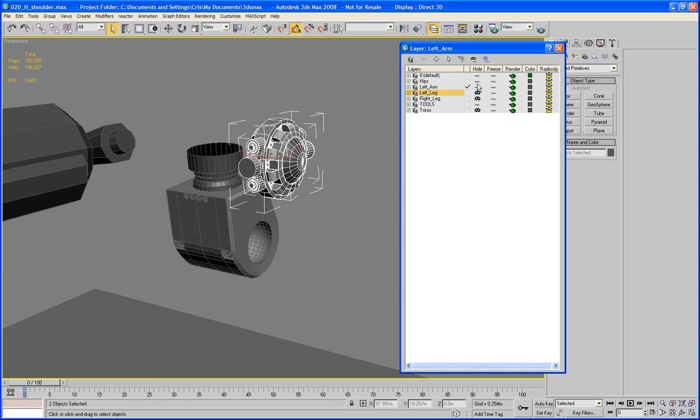Now what I'm going to do is make sure left arm's defaulted. I'm going to unhide my tools, but hide the torso, the right leg, left leg, hips, and default, just so I can work on this.

Now the first part of the arm is just a simple L bracket, yeah? So it's just a simple elbow joint really. I'm going to want to do a little bit of reshaping work on this. At the minute, if you look, there's quite a lot of flexibility built into this socket. So what I'm going to do is take the first two rings and remove those. Here, loop it, Control Backspace, and that'll get rid of this part, because we need this part here.

Now I'm going to cap it off, like that, and just nip to - hang on, where's my secondary reference? There it is. Nip to my secondary reference over here.

Right, now what I'm going to do here, and I'm kind of looking at the shape while I'm doing it, because it's an interestingly complicated design, is I'm going to select this polygon and bevel it first. Just a little bit first. There we are.

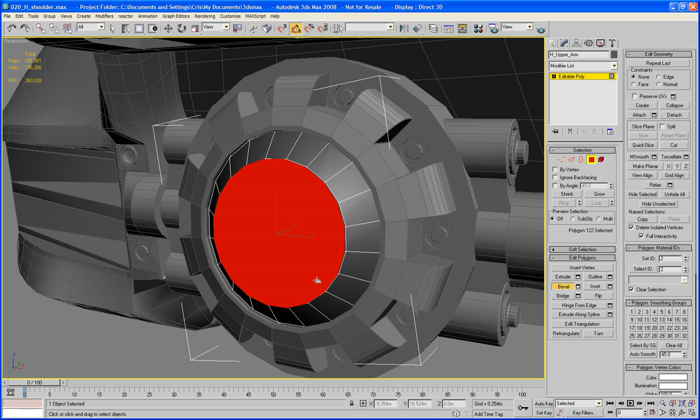And then I'm going to bring it up a little bit, then out a tiny bit like that, and then up like that. Then this tiny bevel in, like so.

Right, now over here at the top, if I select this, this and this, what I'm going to do is just extrude these straight up, like so. Now I'm going to get this one, change it to local, and just move this one until they're flattening down a bit.

Now with all three selected, I'm going to scale them on the local, just in this direction. I can also - hang on, let's redo that. I can also scale them down just to make sure they're nice and flat. And then I'm going to bring the rear in.

Now for this I'm going to move it off being on local again, just move it to world, or even view. There we go. Just bring that forward a bit.

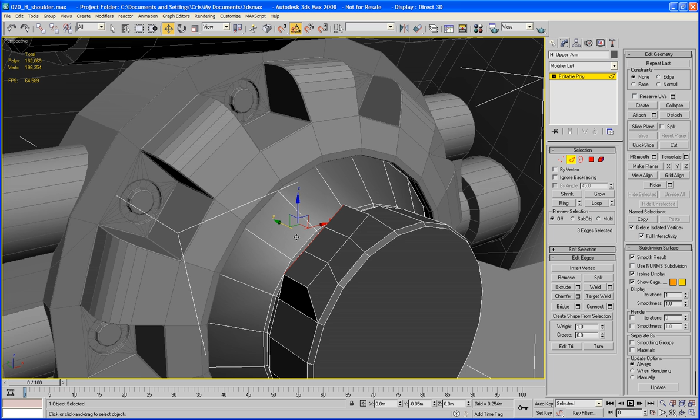Now take this part and this part here, and I'm going to chamfer it, like so. And next, just kind of looking at this piece,

I'm going to make some pipe holes using cylinders. Just auto grid these. I'm going to make them 22 sides, one height segment, no cap segments. Just pull them out. Now then, if they're not appearing, it's because I need to turn auto grid on. There, that's better.

Convert to editable poly, and just grow it out, and then get rid of that back facing. There we are.

Right, now what I'm going to do is just move this a couple of times. So I'm going to put one here, like that, and then I'm going to put another one over here like that.

Then I'm going to attach them and delete these, and then just bridge them, then delete this and this, and bridge these as well.

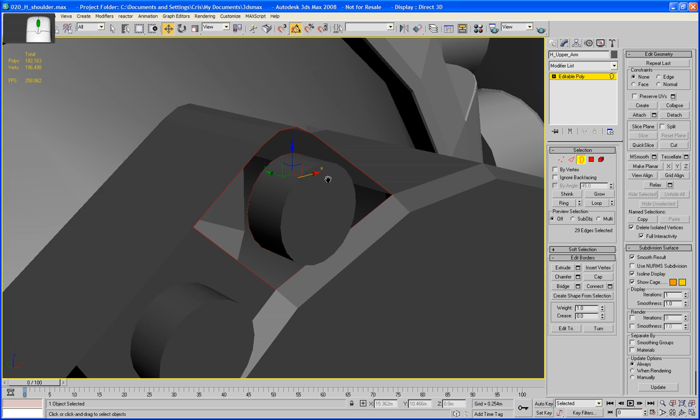Just want to make sure our bridge is going to be okay though, so just hit F4 to make sure we haven't got any damaged polys. You see, we have on these ones. It's these edge chamfers that tend to do it though, so what I'm going to do is move to edge select mode and bridge them instead like this.

There we are, and now I'll just cap these. So the bridge tool is useful, but not very often.

Now I'm going to bevel this a little bit. Tiny inset, and then a tiny bevel in and down.

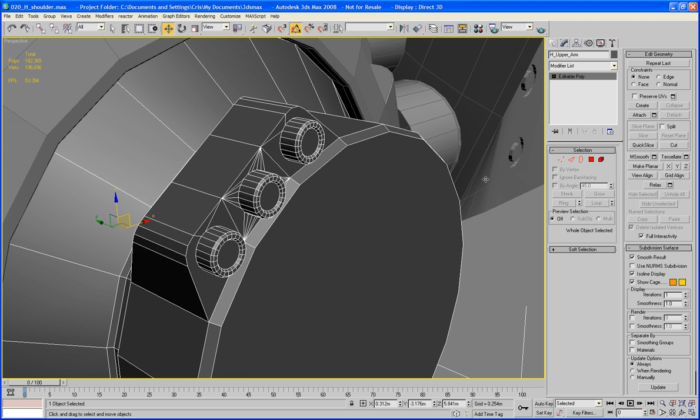Next, I'm trying to avoid doing lots and lots of tiny wires. You can put those in if you want, but the problem with tiny wires is that, if you've ever done lots of them, especially in games modeling, you'll know they're not the easiest thing to put in as normal maps.

What I'm going to do now is grab this, use my rotate tool, making sure I've got angle snap on, and do 90 degrees. Clone it to an element, and I'm just going to pull it straight out like this.

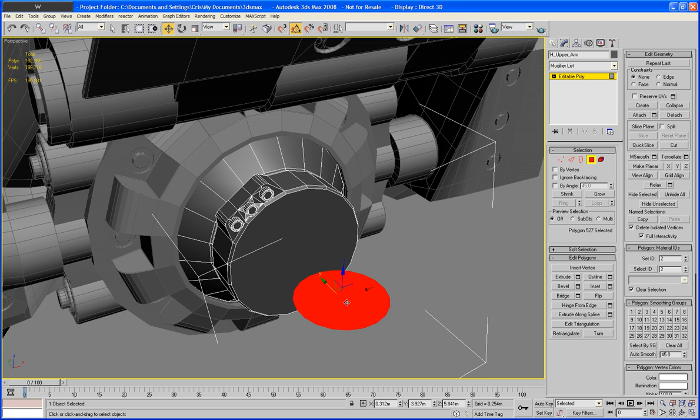Now I'm going to reduce it in size, so I'll just scale it fairly uniformly, and just move it more or less into the right position. It's a bit of a tricky one because I want to make sure I'm getting it in the right place.

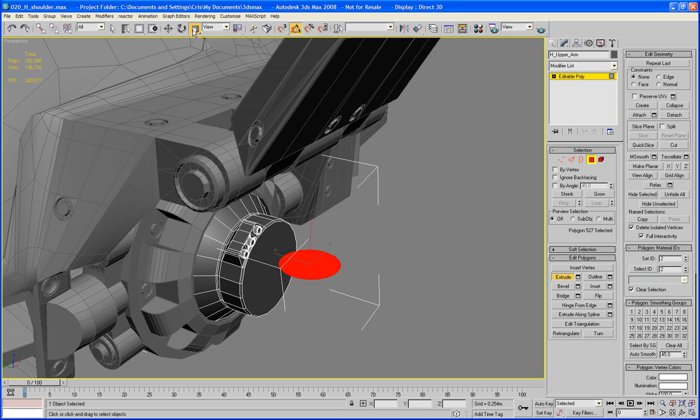I'm just going to scale that out a little bit more, and check my other references if I can find a decent one. There's not very many decent references at the elbow joint because not many people bothered making it in 3D really. Okay, there it is.

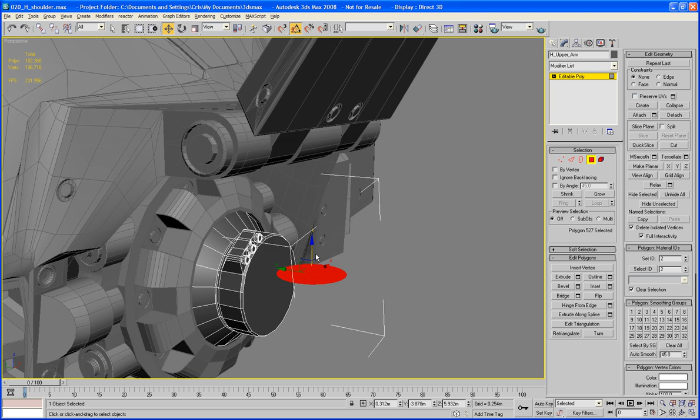Right, I'm going to pull this up to round about here, just before the bevel, and pull back.

Now what I'm going to do is cap the rear side, that'll create a polygon, which means we can now extrude this.

Just making sure I'm extruding in the right direction first. Okay, and I'm going to extrude down to round about there, just where it comes in on the bottom, yeah?

Now, I'm going to go through the middle and do a connect. I'm going to chamfer that connect nice and wide.

Say to about there, and just take out the middle ones. You notice I had this at two segments in the middle - that's okay, I didn't bother removing it since I'm going to delete all the middle ones anyway. Now this gives us this shape that I can work from.

So what I'm going to do is do both of these at once, doing freehand beveling. I'll just cap there, make sure it's not too close - it needs to be a little bit further away, I think. Let's see, maybe not, no it should be okay.

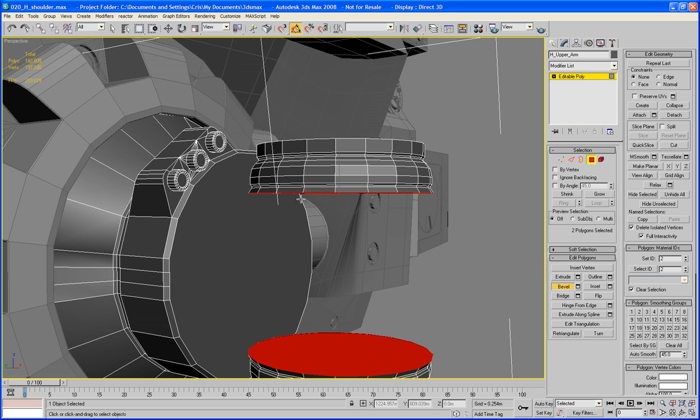It's quite a complicated shape, so take your time doing this, okay? It's a bit like a hamburger shape actually, I was thinking - it isn't really obviously, but you know, that's what it reminds me of. I find it interesting that doing this is actually affecting the polygons over here - you're probably watching that as well.

Okay, and then just pull this in a little bit here. There we go.

Right, because we're going to separate this off into two areas in just a moment, so I'm going to grow this. Like so, and detach it.

Just make sure I've got the inside spindle. Just shrink it down a little bit because I want these two separate. There, now.

Detach, and we're going to detach it as - let me see - well, if that was the upper arm, this is really the lower arm. See? So H higher arm, H lower arm - sorry, upper arm, not higher arm.

Right, now I need to do a little bit of capping on the ends of these. So one's going to have to go here and one's going to have to go here, and just cap that.

I don't know why I keep getting this funky polygon thing going over here - I'll have to sort it out. Unless - oh, I see what's happened, I've accidentally chamfered it by the looks of things. Look.

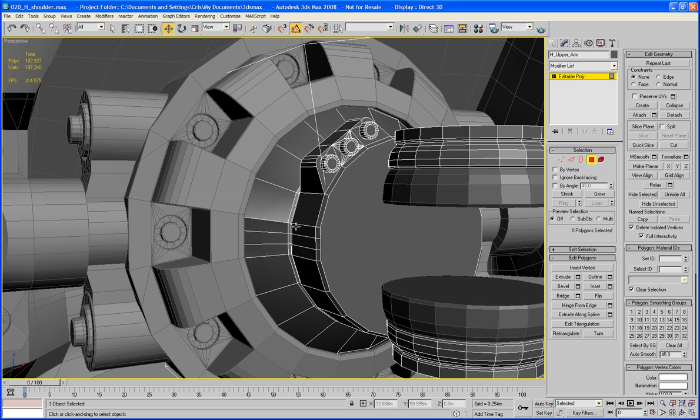Yeah, looks like I have accidentally chamfered it. Oh, that was when I was building it. Never mind, I'll just get rid of this accidental chamfering work - it's easy enough to clean up.

Just a case of using the bridge tool. And I do prefer cleaning up after my mess given a chance, so isolate. There we are - yeah, it's a lot better doing it this way than leaving your model all wrecked.

There we go, right. Now I can bridge these.

Is there some sort of an inverse polygon on the inside that I'm not aware of? Let's have a look. Bridge appears to be not wanting to work. Let's do it the old-fashioned way. There we go.

There, that's better. Oh, I see what happened - I actually got confused and was doing it in the same way as I'd do an edit poly. Sorry, target weld. Let's do this one.

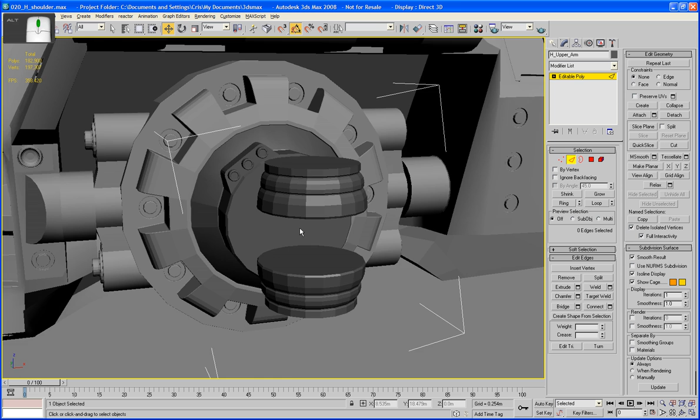Right, so working on this again. As you can see, we've separated it off into two different parts. We've got the main part, which is this ball joint, and we've got this part here, which is basically our single axis of rotation for our elbow, which is pretty accurate because, of course, elbows only rotate on one axis. So we'll come back to this one in a few minutes. What I'm going to do first is work on this.

Now, I'm going to select this top polygon here and this bottom one here at the same time and inset them to round about there. Just kind of having a look to make sure this is going to fit okay.

Could really do with rotating this entire piece here, which is a bit tricky because, as you can see, it's not going to rotate uniformly. So let me see, I'll move it 10 degrees and then manually move it into its new position. Could probably do with a little bit more rotation. Yeah, that should do it. There, that's much better.

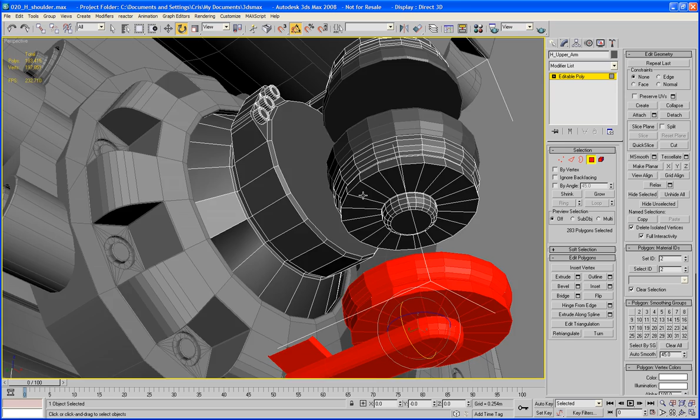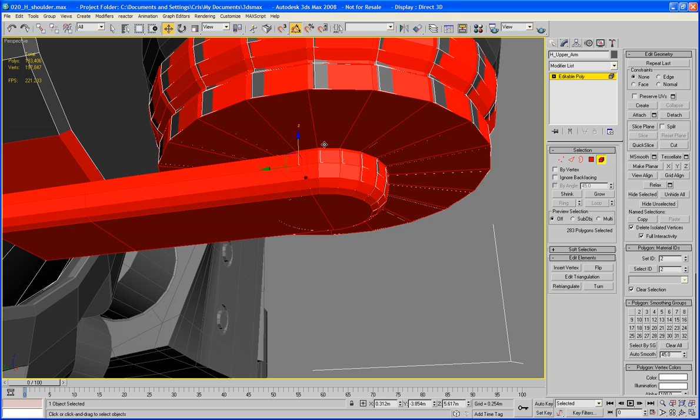Find the 3 pieces it's going to connect to. There, and there. Okay, next. Start lining this one up. Need a little bit of lining up, you see. It's more or less in the right position though. There we are. Now I just need to raise it up a little bit, I think. Let's have a look. No, it looks like I've just got to raise it back a little bit.

Okay. Just make sure it's not going to cause any problems for this inside piece. Delete that. Nope, looks like it's not, so that's good. Now all I've got to do is bolt it on, so what I'm going to do is just grab here, like that, do a weld, and that'll weld all my verts together, well, nearly all my verts together, just to increase my weld amount. There. Should do it.

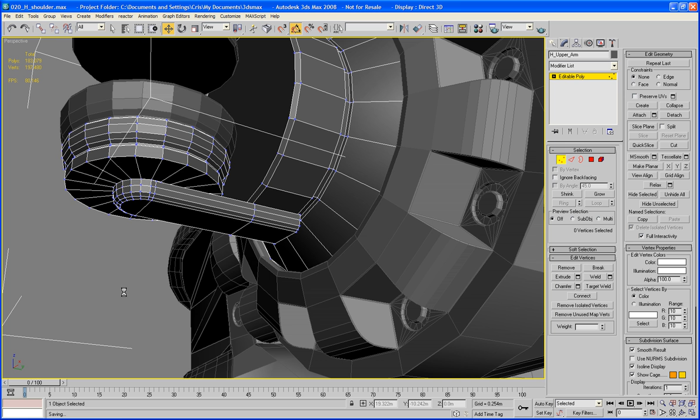Right, so next, after I've just checked that this is just one element again, and it is, let's have a look at these parts which are going to make up the elbow join. And what I'm going to do is come out of here and here, and tricky one, this one, so I'm just going to be careful how I do it.

Looking at the shape again, extrude it down a bit. I'm going to bevel it wide a bit, not too much, just a little. Give it a 0 length extrude bevel. Now I'm going to bring it down like this so that it attaches to here. Now, I think the easiest way to do that will just be to bridge it. There we are.

Okay, now what I'm going to do is select this edge here and this edge here, and I'm going to loop it and then do a connect and just click OK. That way I keep the shape of our piece. You'll note it hasn't curved anymore, but I've now got these two pieces here, which is kind of what I want. Okay, next.

Just pull my microphone off my ear for a second and check I haven't paused it. Good. Okay, again, looking at the shape of this, I've got a part that's going to come out and join the arm, so I've got to make sure that I get this shape right. So I'll go and check a different one.

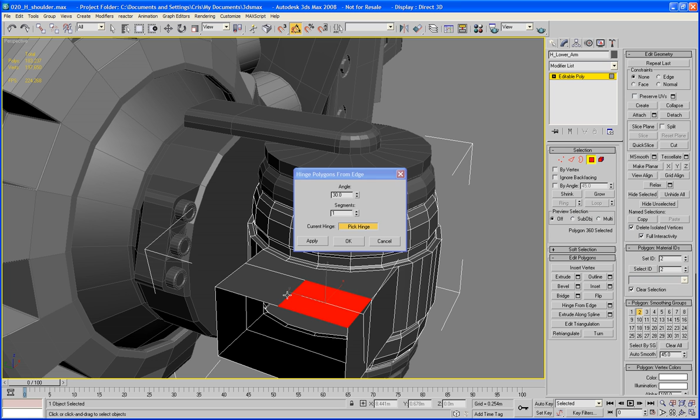What I'm going to do is grab here, here and do a connect. And then go here and do a hinge from edge. Pick my hinge, it's going to be this one. 180 degrees and 11 segments. Now you've seen me do this a number of times, so it's nothing exciting and new. Delete the end polygon there.

However, what I want to do is take this, all of this part, there we are, and just attach it as an element.

Now I'm going to make a clone of it, so 180 degrees, that underneath.

Okay, now with both these parts selected, I'm going to increase the size of it. Kind of need to separate these a bit. Keeping them separate for a reason, by the way, it's not just insanity.

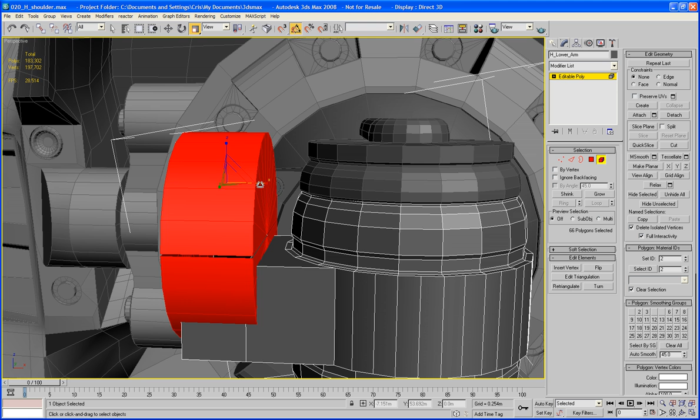Okay, I'm going to scale them in a bit. Make them the right width. Push them down. Like so. Okay.

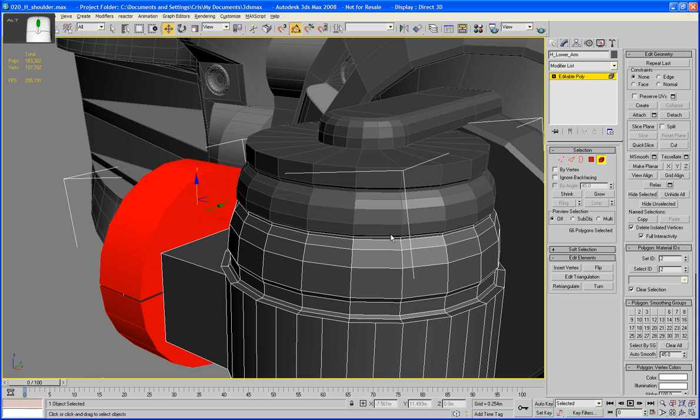Just looking at the size, what I need to do, you see, is kind of make a cut off between these two pieces. Okay. Now I found my cut off area, so I'm going to take off these. And these. And all these inside bits here.

Told you it was a weird, complicated system. You're like, no, Chris, you didn't tell us it was going to be like this at all. You're just a big fibber.

But don't worry, it will create for us our complicated shape. And it'll create it without the pain in the arse of booleans, which does awful things to your model and makes you want to cry. So, that's a good thing. Not the crying, obviously.

Right, so we now have this shape here. So, what I'm going to do is drag this nice and wide to about here. Let's kind of get it to there. There we are. Drop into perspective. Do it the other side.

And bring this one across to about here. Right. The reason for this is because we know that this is more or less a circle shape, and it allows us now to kind of marry this in to this shape here. We wouldn't otherwise be able to do this, not without a lot of kind of really pain in the arse beveling. So it's a good way of doing it.

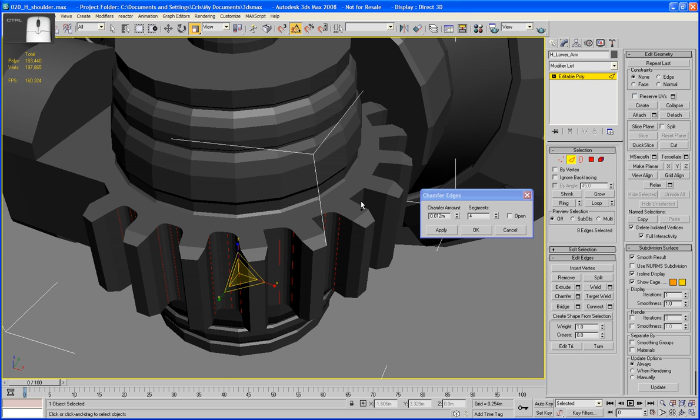So we'll just go through all these. It won't take us a minute. It'll take us a couple of minutes.

Wait for autosave. There we are. Said it before, don't turn autosave off. You'll regret it. And no one will feel sorry for you. It only takes up a few seconds, a couple of minutes on only the largest projects.

I'll not bother chamfering that edge there. I'll do this one instead, there we go, you see. Really nice lug nuts it does there. Click OK, go back to select by.

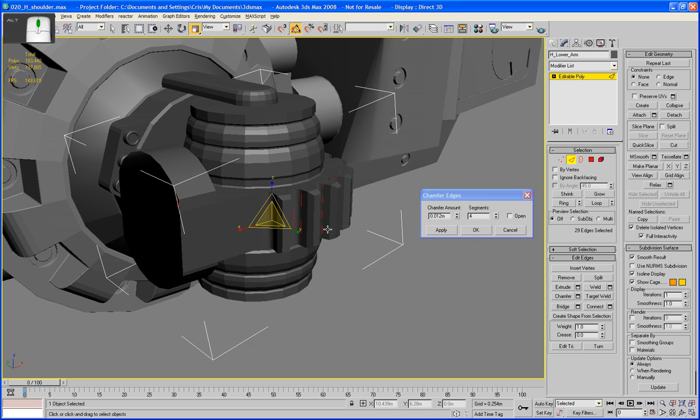Have a look at these end polygons. I can reduce them in size if I want to, like that. I think I probably will.

Right, getting a bit closer. Okay, that looks fine. Grow it. And again, just bring them all together a bit like that. There we are. And as you can see, they're all kind of intersecting through the middle of this.

So what I'm going to do is build a minor depression on the inside of here, just to take that into account. And I'm going to cap off the end of this because this is where it's going to connect to the gun arm. So cap there. Right.

Just isolate this a moment, makes things a little bit easier for me. And I'm going to cut these ones in half. Get a bit closer for this one. Just use a connect on them.

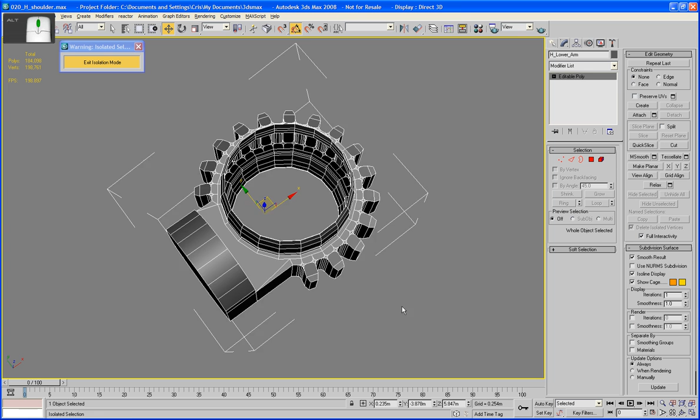Yep, good. What I'm going to do now is have some pieces come off this. So I'm just going to isolate it. And I'm going to bring my pieces off here. Okay, and off here. So I'm going to extrude them just a little, then I'm flattening them.

And they're going to come in and attach onto this. So I'm going to extrude these by 0 and bring these out.

And I'm going to grab these inside parts here and here, bring them in, and back. So it makes things a lot smoother when you do it that way.

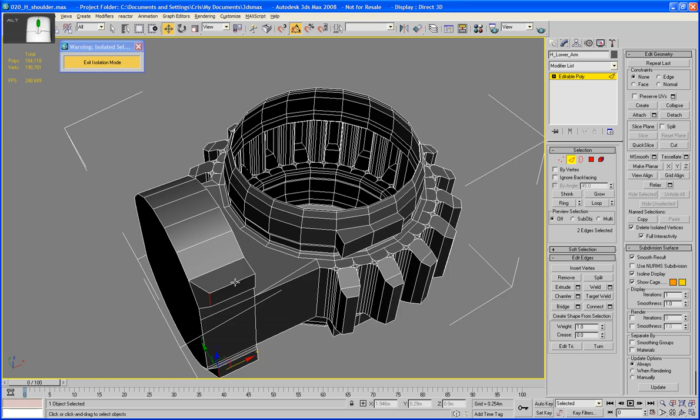Okay, I think what I'm going to do as well is just move that one up to about there, and that one to about here. Messes with our shape a little bit, but that's not the problem. Just to make sure this is okay.

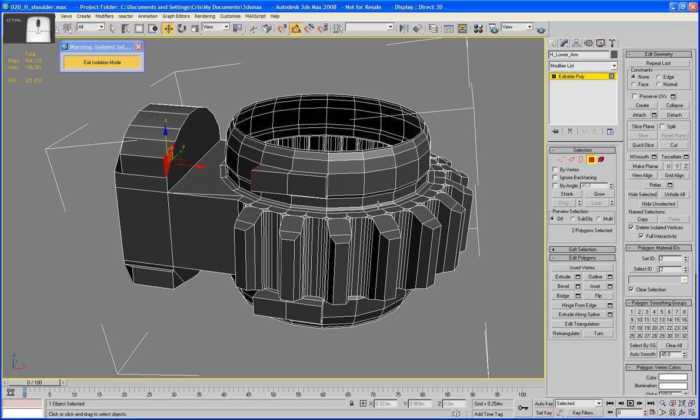In here to here is a bridge. And in here to in here is a bridge. That one's twisted, so we can just use the twist on it. There we are, and that'll fix that.

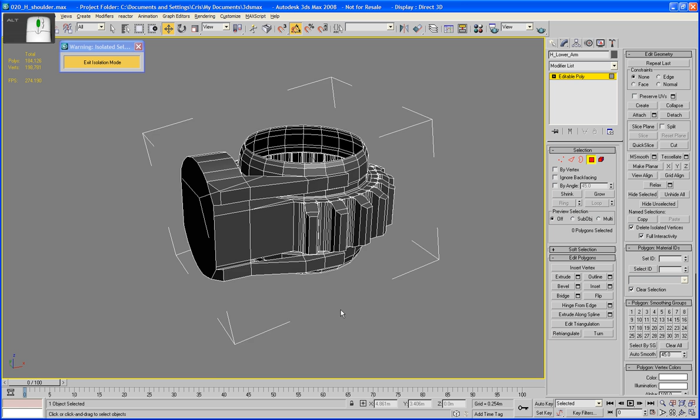Right, now what I'm going to do is apply some details to these two arms. It's tricky because I can't actually see enough inside these to be able to accurately work out where the detail goes from the plan, so I'm going to have to draw them on myself and hope for the best, but that usually works quite well, so I'm not really that worried. It is a nice mechanism, cleverly done.

Right, so I'm going to run a script, and it's going to be my script from over here. Set my selection as a source, and my distribution object is going to be, I think I'm going to choose this one, and the distribution object to that one, just in case the first one's too big. Now let's see, first of all, how big it is on this.

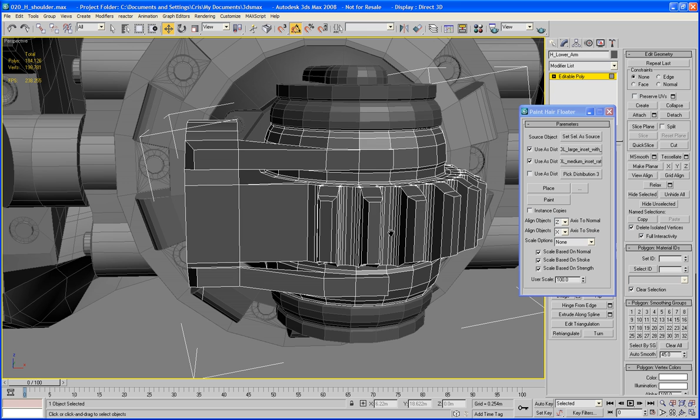That's pretty large, in fact that's massive, though it does look quite nice there. Okay, and I put them both on anyway. There, I'll put this large one here, then move to these slightly smaller ones, which are still pretty damn large. Let's pick that small one. Hang on.

So, let's see. Distribution object 3 can be this one. It's a good one because it's really tiny, but there we are. Turn off place again. Right, now let's try it. Yeah, that's right. That works nicely.

So I'm going to put one here and one here. And here and here. Take your time kind of getting them lined up properly, because it obviously looks a lot nicer if you do.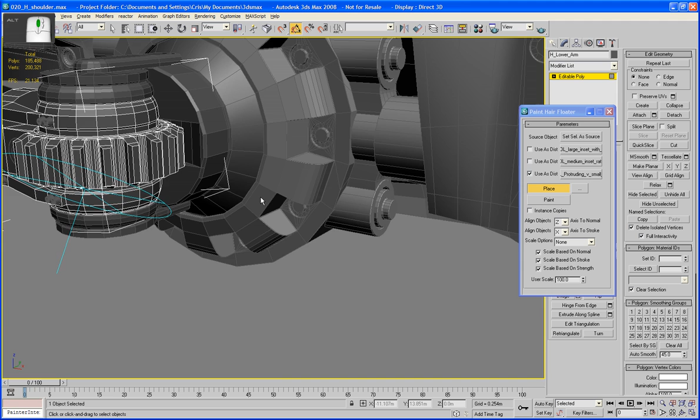Just having a look at places where I can add these, because I don't want to screw with the detail, but I do want to add these parts to it and make it look like it's supposed to be there. There we are. These things come in really handy as well if you ever want to do something like a wire jumble script on them.

Okay, let's attach them.

Really hoping some people are going to do WIPs on this in the forum. I think a lot of people look at Ed 209 and kind of go, ooh, that would be a bit too difficult, or ooh, who in their right mind would want to do that? Me included, really. But no, it's a fun project. You should try it.

Okay, go to this one. I'm going to zoom in on the polygon before I start bridging everything. There we are. It's always a pain because sometimes you get like not the exact outside edge. So there we are. And then a cap again.

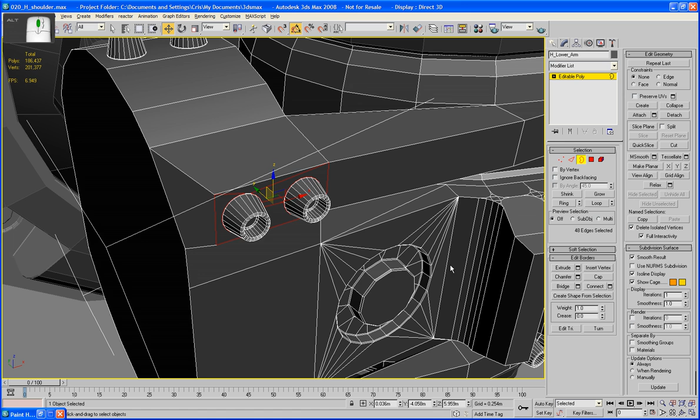I think possibly this tutorial has included more use than any other of this tool.

Okay, bridge. And then cap. And this one. Don't worry, we're nearly finished. I've got a fresh can of Diet Coke waiting for me when I'm finished this bit, which will be nice.

Okay, let's get rid of these bits. I mean, we could just leave these loosely sitting on the surface, but I think it looks a bit crap when you do that, to be honest. It's not just that as well. When you optimize the model, if you don't remove the detail, and these are designed to be very, very easily removed instantly, but if you don't remove these and you optimize it through Polygon Cruncher or whatever, then...

Sorry, I just do that. Then it can sometimes make a pretty awful mess. So there we are.

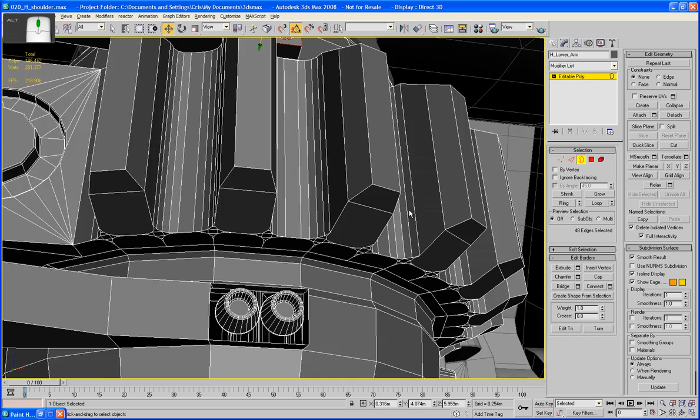Some interesting looking tops here. Look at that. I may have to, yeah, I'm gonna have to scale these back flat. Either that or put a cut straight across these parts. I'm gonna scale them back up to the right size again. And that one hasn't got a chamfer look. There we go.

Right. Anyway, before I get back to fixing these, because they are going to need to be fixed, let's get back to doing these. Still got detail to do on the other piece as well. Bet you can't wait.

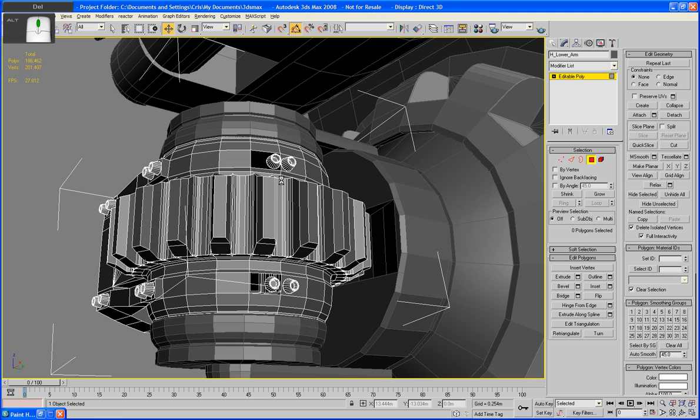Right. Just bridge that. Let's use an F4 to make sure it's okay. And again. There we go.

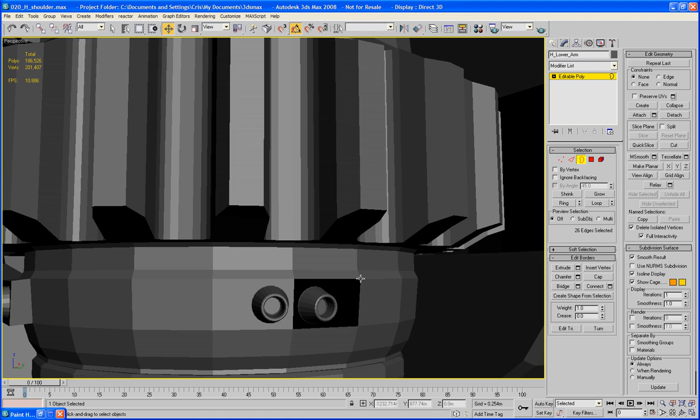Now let's select these polygons again, because we're going to have to put them back up. The alternative is to cut a line across the top, but to be honest, I'd be here for a while, and I don't want to just pause it or time lapse it at the moment, because I've gone pretty much without doing that so far.

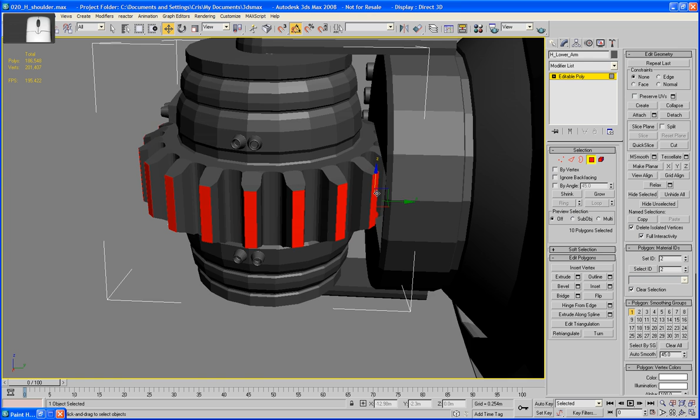I'll never get to 3D Valhalla if I cut corners, you see. Right, there we go. It's cool because it still fits in there, so that's a help.

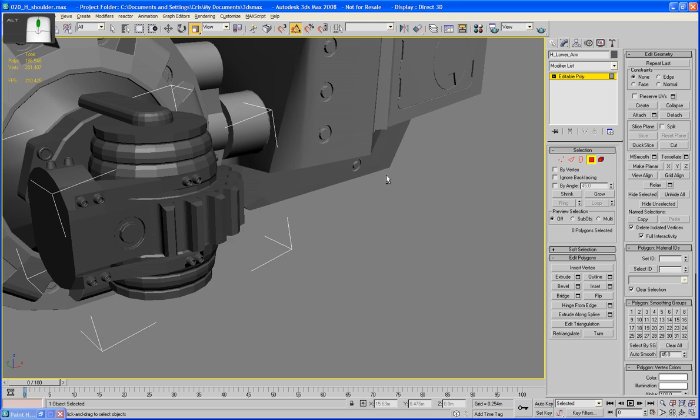Right, now let's have a look up here on these parts. I'm going to add some pieces to that, so let's hide this selection for a bit, and zoom in on this. Got to be careful that I'm not going to have any intersections going on. Use this medium bolt, set selection as source, and go into place mode. Put one there and one there.

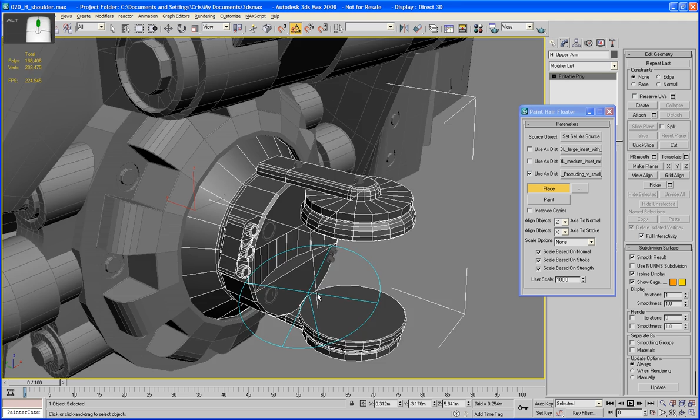Then I'll go into my smaller ones. I'll put one here and here, here and here, down the top of this. Put those like that—no, I'll just have two actually. That works it quite nicely. Maybe put one there like that as well. There you go, you see, it didn't need to place too many.

It should be more than enough for us to add to this piece, certainly. Delete these two.

And let's start by bridging these, and here, now down here. Please note this section is nearly finished, incidentally. As for the modelling itself, I've just got the gun arm left to do, and that'll be done. How long the gun arm takes, well, that's anyone's guess—haven't recorded it yet.

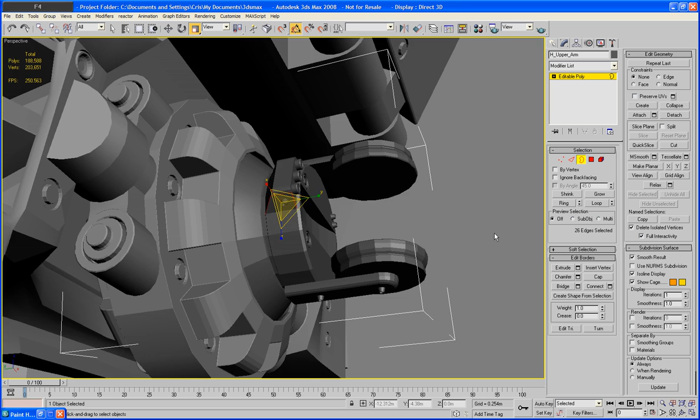Okay, let's cap this and this, now over here, and bridge. Now go over the top and do this bit, and I'm going to bridge from here to here, and here to here, probably.

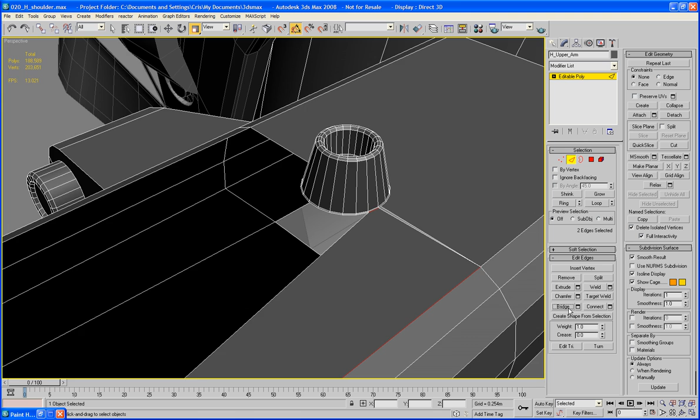If it's any consolation, I'll be quite glad when this piece of arm's out of the way as well. Over here, there we go. And now we can cap all these sections, you see. So make sure it's only that part there that's capped. Now cap this part, and now cap this part.

Right, bet you'd forgotten about this bit, hadn't you? Don't worry, won't take long. That's there.

What I particularly like about the placement tool is that if you move your mouse while you're placing it, it rotates the item. However, that can be an issue sometimes when you're creating your placed item, because it won't be lined up exactly the same as the ones on the other side. However, the reason I like it is because of that—it puts a lot more, not character, but it makes it slightly less symmetrical all over, whereas having all the screws or bolts placed as if they're threaded exactly the same tension everywhere is just completely unrealistic. And I digress.

There we go, zoom out. Right, so take a moment, just sit back and look at the piece that we've made. If you've been following along in real time, you should feel pleased with yourself, and maybe have yourself a nice cup of tea to celebrate, or coffee, or beer, or neat vodka.

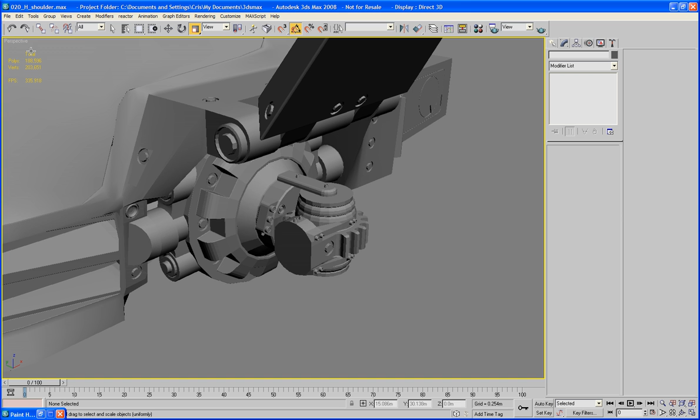I think I'm going to do EdgeChEx on these, so I'm going to save this as work, so that if my EdgeChEx goes horribly wrong, at least I'll be able to recover it. So we'll use this one first—EdgeChEx. Just wait for the magic whilst looking out the window. There we are, click standard.

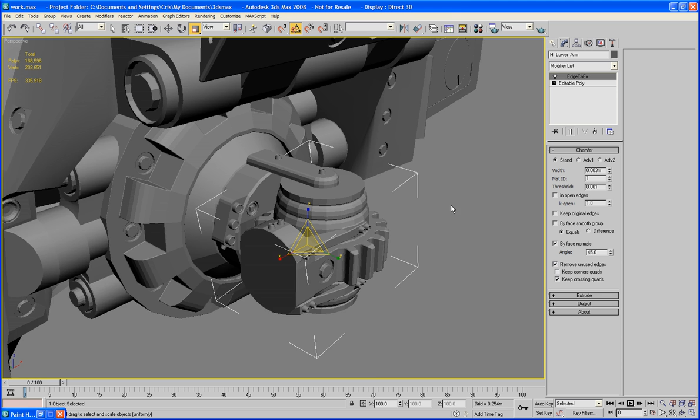I was about to collapse this and load up the next one. I'm just going to increase the amount of chamfer just a little bit. I don't want it massive though, because it'll break all these. There we go, and I reduced the angle to 44.9 as well. Convert to editable polygon.

There you go, so that's that part done. Now this part is going to have the same treatment—EdgeChEx, and exactly the same parameters. Now we're going to use a smooth upon it, and I'm going to make this about 22. It's usually enough. Same with this one here.

Whoops, that's an EdgeChEx, so I was about to put on there, whereas I just wanted to smooth. There you go, 22 again.

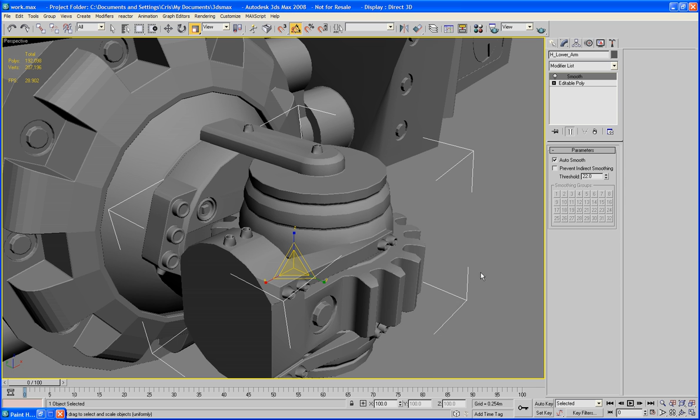And I'm just going to reset X form on that, because I'm going to want it to rotate from the correct part. Thinking about it as I am, I'm going to line it up to that while I'm here. Now if you look, you see I'm going to have to get it between these two, which is a bit more awkward. So there, I'll get it at the middle of this apex, and it should be in the middle then. See and find out. Yes, it is. Beautiful.

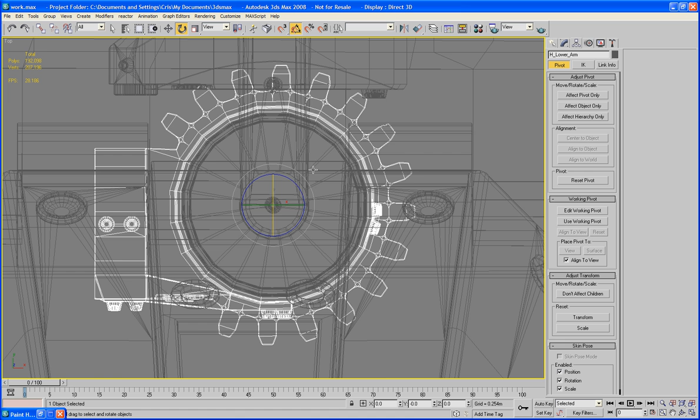Had to be careful with how the parameters here for the gear are worked out. Such a clever design.

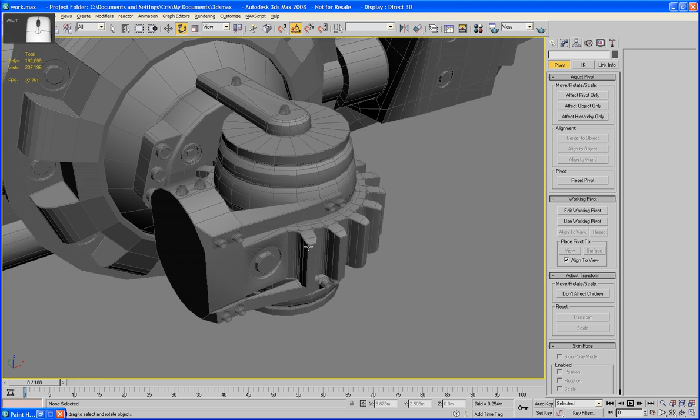Okay. Yay, I like that. Okay, so I'm going to move this back down by 75 degrees, so I'll be covering over this part again.